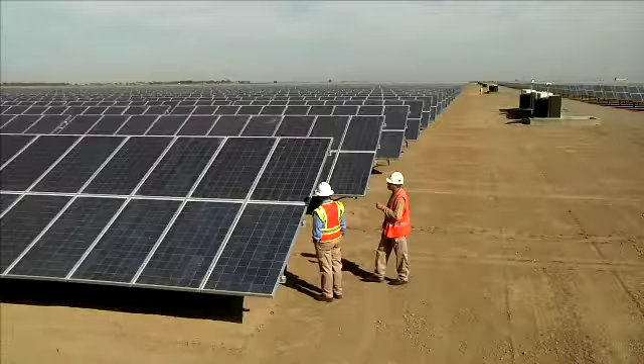On this edition of Our Green World, a company that specializes in storing renewable energy to help create the smart grid of the future.

Researchers show us the chemistry that makes our green living possible.

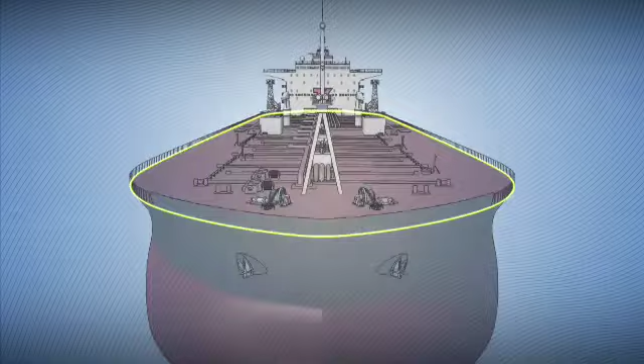But first, we take you to Vancouver, Canada, where the shipping industry has introduced a new design for the most energy-efficient ship on the seas.

Ocean shipping is the lifeblood of our global economy, but with the greening of the industry, future shipping is likely to be dramatically different than what it is today, especially for the next generation of tankers. Shipping overall is just such a huge industry, with 50,000 ships and 1 million seafarers transporting 90% of the world's goods. It's a big global industry.

And while it's one of the most efficient from a carbon emissions standpoint relative to other transportation methods such as rail, truck, or air, as an industry we want to constantly evolve and have a smaller carbon footprint.

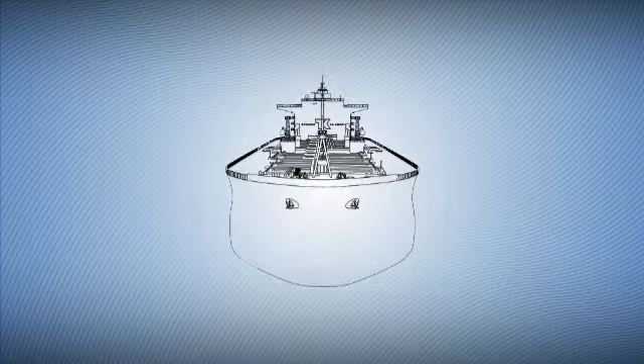New environmental legislation is underway, and shipping prices continue to rise. Since 1999, fuel prices have risen by over 500% and are now the greatest cost a vessel will incur over its lifetime. This means innovation in shipping is crucial for the future.

Fuel costs are every ship owner's number one cost. For example, if we were to order a new ship for $50 million, we would spend $250 million or more in fuel over its lifetime. So it makes economic sense as well as environmental sense to try to save fuel.

In the last decade, for sure, we've seen much more focus on the environment, and I think we've also seen the rising cost of fuel. And if you put those two together, and you take into account that we haven't seen any innovation, then it seemed like the perfect time to really start thinking about how you could do things differently.

As a world leader in shipping design, Teekay Corporation has taken upcoming emissions legislation and high fuel costs not only as a challenge, but as an opportunity to build the most energy-efficient ship possible, the One Spirit, an eco-design that reduces fuel consumption by 30%.

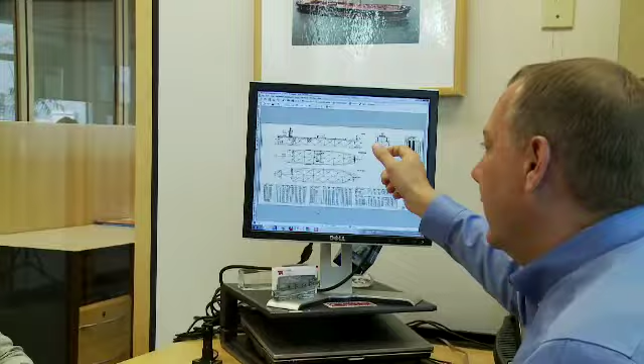While other shipping companies have developed eco-vessels by tweaking the design or doing simple add-ons like paint, Teekay took a far different approach by starting over and going right back to the drawing board on vessel fundamentals, here at its Innovation, Technology and Projects Unit in Vancouver.

So it made sense to go back and look at vessel design and alter the vessel design so that we were able to minimize the total life cost of the ship. So that's exactly what the team did.

Back in 2006, the project started off, and I think it showed great foresight by the project team, because they were able to look ahead and say, well, we don't believe fuel price is going to come down. If anything, fuel price is going to increase. So it makes sense to start to look at this project now.

And for a vessel design, it makes sense to go right back to where the rubber hits the road, so to speak. So we went back and we looked at the hull form, because that's where the ship interacts with the water first, is the shape of the hull. So if we were able to optimize the shape of the hull, then it gives us a very, very good platform to start to look at other innovations and other ways to reduce the fuel cost associated with the ship.

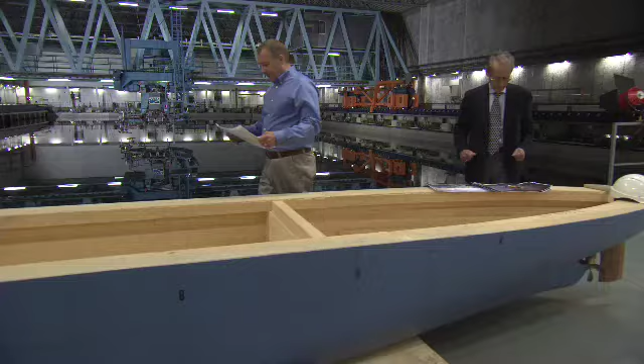Teekay then partnered with a world-renowned team of technical experts to create the tanker's ultimate design, undergoing rigorous tests at its testing facility here at Chalmers University in Gothenburg, Sweden.

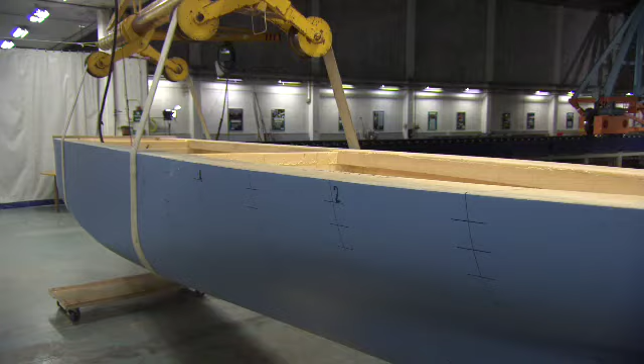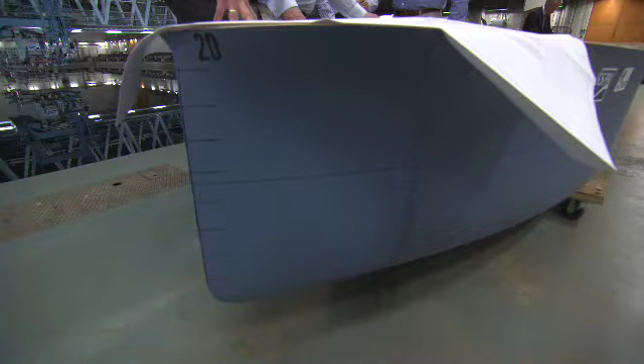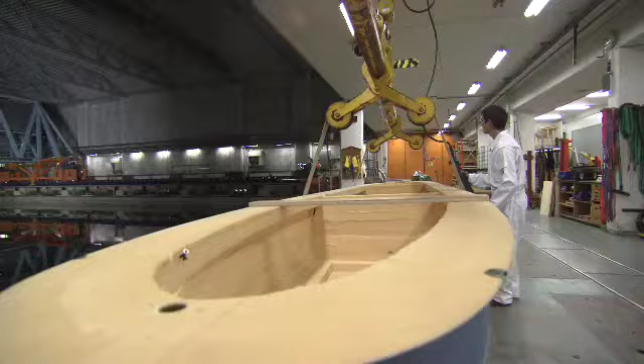But there are facilities such as this one behind us, where it allows you to build a scale model, put it in and start to see how it's reacting, and see if you're getting the savings that the computer indicated you were going to get. And that's what we're doing here today.

Well, because you have a facility here that allows you to simulate the exact same conditions, whether that be a hurricane or calm conditions, that you're likely to experience at sea. The end result is a tanker for the future called One Spirit.

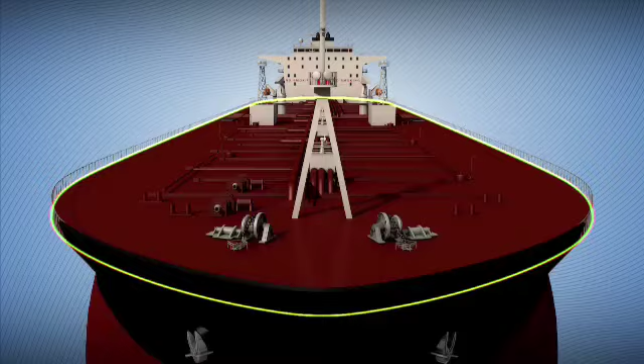Which focuses on 3 key design innovations, starting with the all-important hull of the ship, for which the team ran over 40,000 simulations to find the optimal design that reduces resistance for a given cargo capacity.

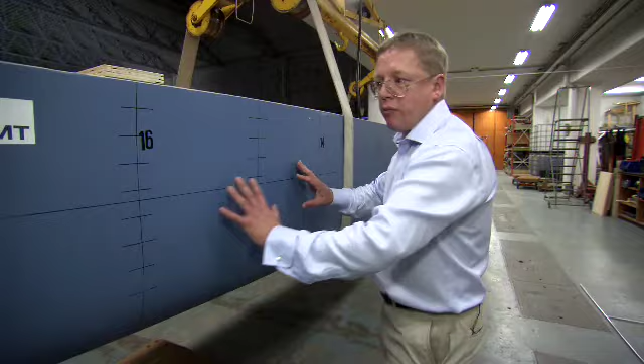On a conventional tanker, this portion is actually quite full, and the wave that comes round can dip down quite a lot, followed by a breaking wave. What we've done is made this portion much more gentle, so the wave coming around the corner manages to come back up without breaking. That contributes some 2 to 3% of the savings.

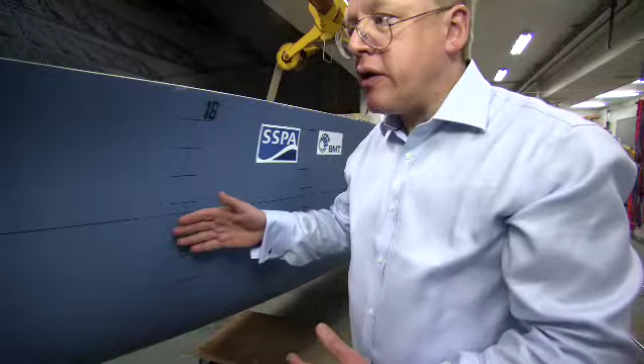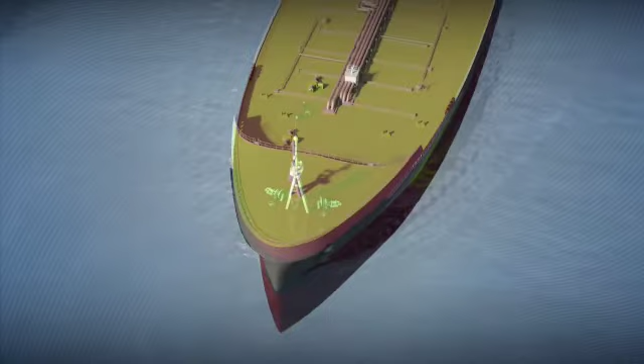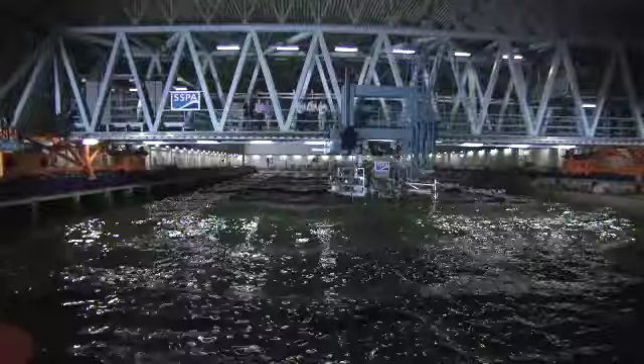By narrowing the beam of the ship and streamlining the bow and stern, the design team created a sleek new form that by itself resulted in over 10% fuel savings, while maintaining the cargo volume of the ship by increasing the hull's length and depth.

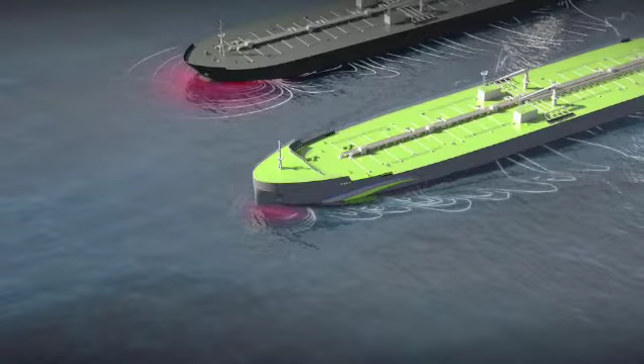The key thing about cargo carriage is it all comes down to $1 per ton or $1 per barrel freight cost. The quickest and single driver we can put in to reduce the $1 per barrel freight cost is to reduce the cost of the bunkers. The fact that this ship is more environmentally efficient, significantly more environmentally efficient, burns less fuel, has a direct impact on the landed cost of the cargo.

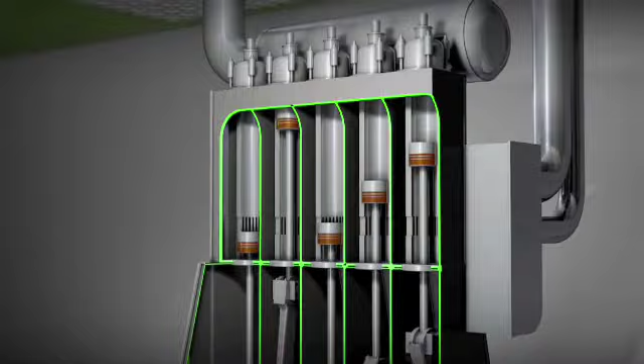The second innovation was adding a larger, more powerful G-type engine to the tanker, with increased capacity to slow the combustion process in order to recover more energy from fuel. So what we're willing to do is pay more money for a bigger engine, but that allows us to derate the engine, minimizing the fuel consumption.

The energy savings associated with this are sufficient to power 2,000 homes or to power 700 cars every day on the road. And if you expand that up into a fleet the size of Teekay, it's the equivalent of 42,000 cars being taken off the road every day.

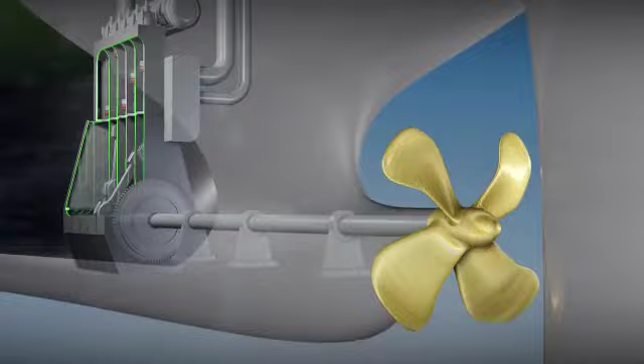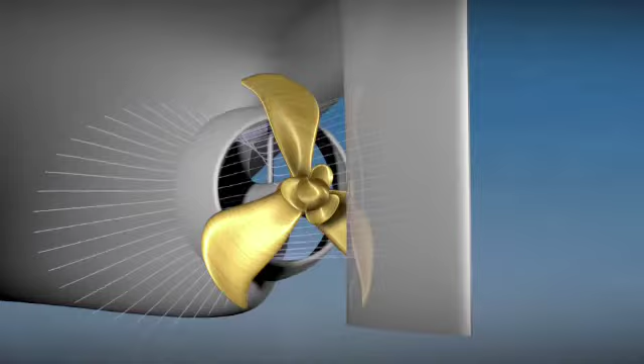The bigger engine and slower shaft speed resulted in a third important innovation: being able to increase the diameter of the propeller and reduce the number of blades from 4 to 3, to more efficiently move more water with each rotation. The basic thing we wanted to do was to have as large a propeller as possible, because by the simple laws of physics, the larger the propeller, the more effective the propulsion.

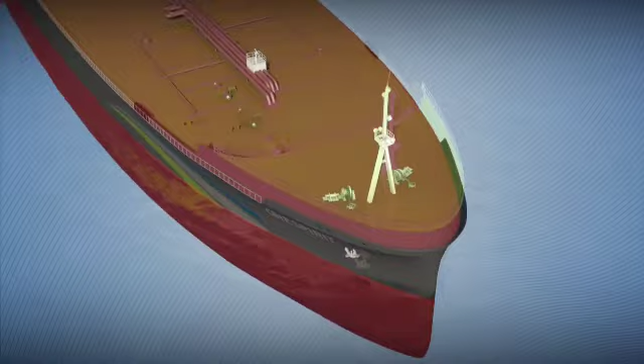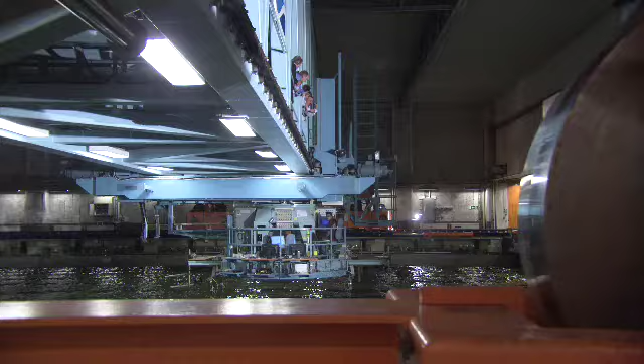So altogether, we have these 3 factors: the improved hull resistance, the improved propeller efficiency, and the improved engine efficiency, that have fitted together into what I would call a fantastically positive design spiral. This team and these 3 design advancements have all come together to create One Spirit, Teekay's newest green tanker, and the most efficient vessel in the shipping industry, with over 30% fuel savings.

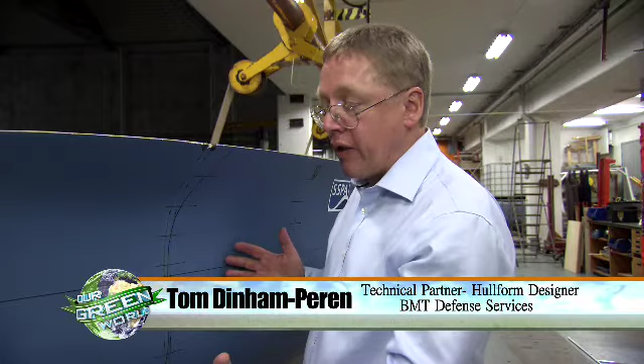This project is a hydrodynamicist's dream, to be approached to do a blank sheet paper design study, and we've come up with what we feel is a world-beating solution. Shipping is already the most efficient form of transportation out there, and what this ship does is improve on that — another 30% saving over what is already the most efficient form of transport in existence.

That's important to One Spirit customers like Teekay Tankers, with its fleet of vessels that transport crude oil around the world. Our goal is to provide energy to the world by being a leading provider in marine transportation. This ship that can save 30% in fuel will benefit our customers, our shareholders, and the environment. And so it makes just good business sense.

One Spirit may be the only green vessel of its kind, but it represents the next generation of tankers. Next, renewable energy may be the future for powering our green world, but X-Treme Power relies on being able to store it.

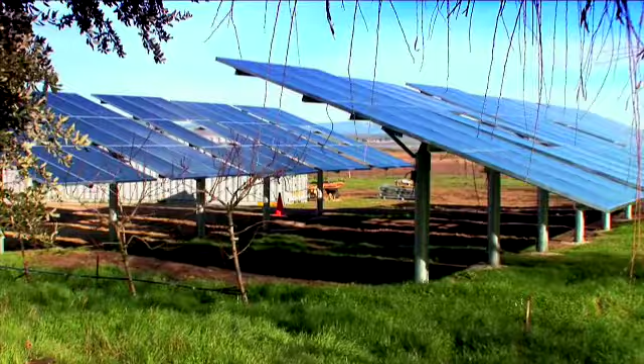Renewable resources like wind and solar may be the symbols of green energy today, but harnessing and storing that energy is the key to powering our green world, and ultimately creating the smart grid of the future. Storing wind or solar-generated power is very important because both of those resources are intermittent. The sun shines through a few hours of the day, and the wind blows intermittently, sometimes not at all. So the use of electricity requires a reliable source of electricity or power.

The combination of having wind and solar generation allows you to have a clean, relatively inexpensive source of electricity. In combination with energy storage, it allows you to provide reliability, so the electricity is there whether the wind's blowing or the sun is shining. The future of powering our cities and businesses resides in the ability to provide large-scale energy storage and power management.

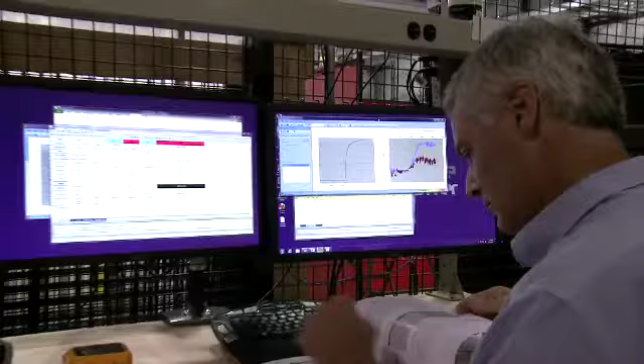It means extreme power, which is the very name of the industry leader in the energy storage market. Here at its headquarters in Austin, Texas, and its Kyle Operations Center, the business of designing and integrating power management for communities and providing solutions for massive energy storage is the round-the-clock mission of Xtreme Power's team of engineers and technicians.

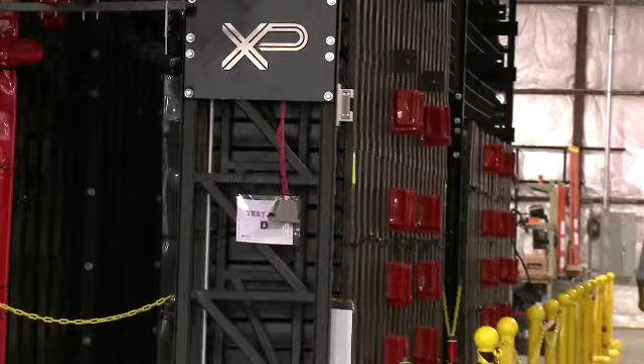What sets apart Xtreme Power is our ability to take software and engineering integration skills to use multiple energy storage chemistries, combine them with power electronics to provide grid-scale, multi-megawatt capabilities to store electricity and deliver it on demand, real time to the grid.

The power capability of this DC block is pretty incredible. I mean, really we're limited by the size of our front-end converter. But a general setup like this would be enough to power 500 homes.

Since its beginning in 2004, Xtreme Power has been installing power onto the grid across multiple projects around the country, including their pilot project in the Hawaiian Islands that supported the energy output of a 30-megawatt wind farm.

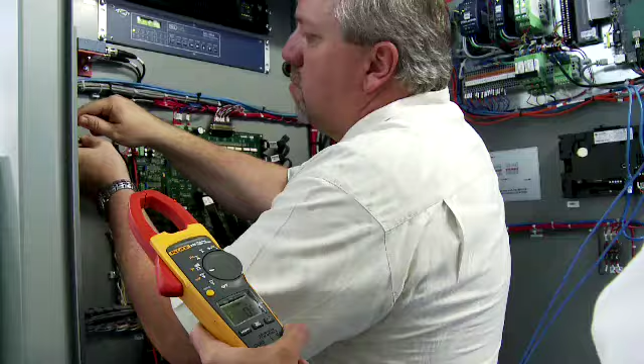The use of wind and solar in Hawaii allows them to use a renewable, clean source of energy, but it's intermittent. What we do is store electricity from either wind or solar-generated sites so that we can smooth and firm, meaning provide electricity when it's needed, whether the sun's shining or whether the wind's blowing.

For remote islands, being that their grids are unstable, having an energy storage system that Xtreme Power supplies is pretty important because it gives them a very stable power source.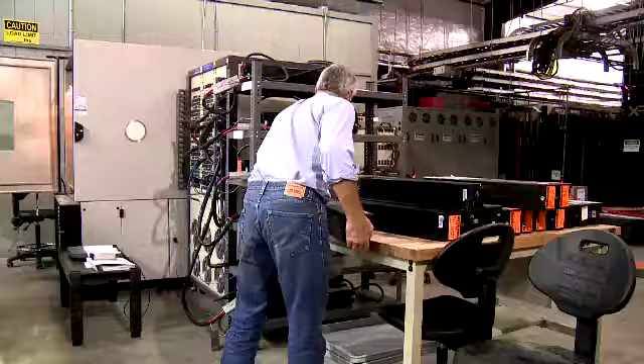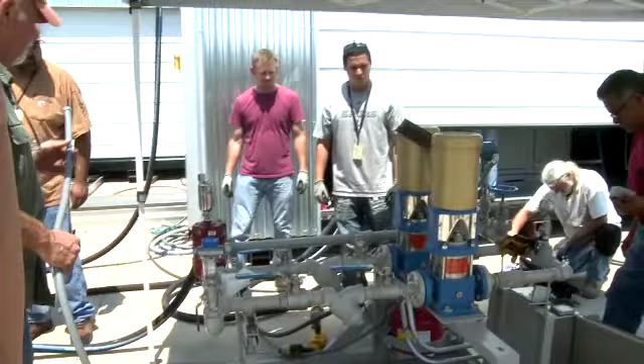X-Treme Power's unique energy storage system, known as the Dynamic Power Resource, has now spread across a dozen more projects, enabling clean energy resources to deliver more power onto the grid reliably and efficiently. It's through X-Treme Power's complete integration and system controls expertise that each project is able to overcome grid challenges, whether they're on remote islands or in congested load centers of a city.

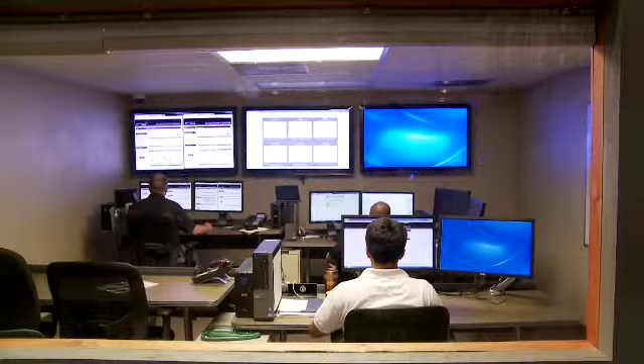Here at its Operations Center in Kyle, Texas, all of X-Treme Power's field installations are under microsecond control and analyzed around the clock. The Operations Control Center here is very critical. A lot of the applications that we're going into are dealing with utilities, the power grid, which as we know has a very high level of reliability required.

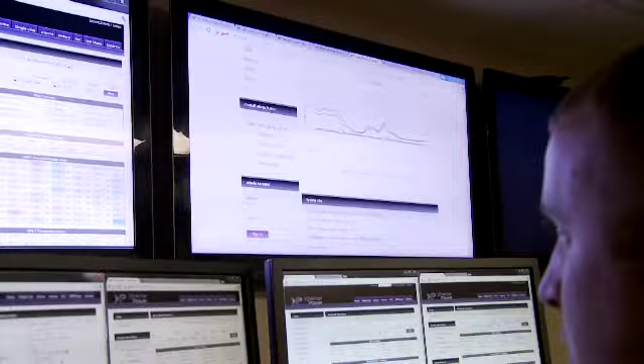So we're able to offer that sort of utility grade reliability that's expected, not only through proper design of our systems, but having a 24/7 monitoring center here that can respond very, very quickly to any sort of anomalies or any sort of event that we see anywhere at one of our sites.

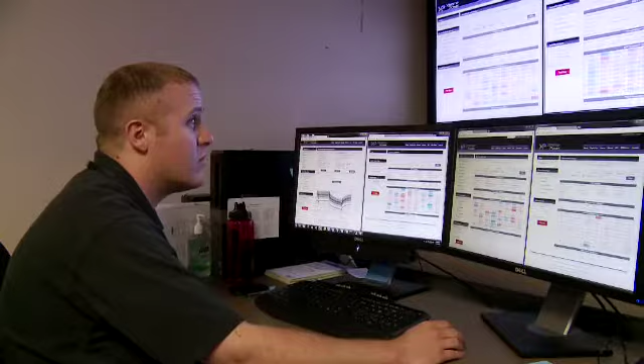This is also where any grid challenge or problem can be simulated in software, so it can be tested with actual hardware before ever going to the field.

Most of our sites have demands for very high levels of reliability, utility grade sort of assets we're providing. So we're able to provide this level of reliability that's expected by having this room constantly manned, and we're constantly watching our sites for any sort of events or disturbances that may occur.

Energy storage has the potential to become a $125 billion market on a global basis, and X-Treme Power hopes to become the backbone of the 21st century grid.

X-Treme Power wants to provide clean energy on demand anywhere in the world. We have projects on the drawing board now for China, Japan, Korea, Thailand, Malaysia.

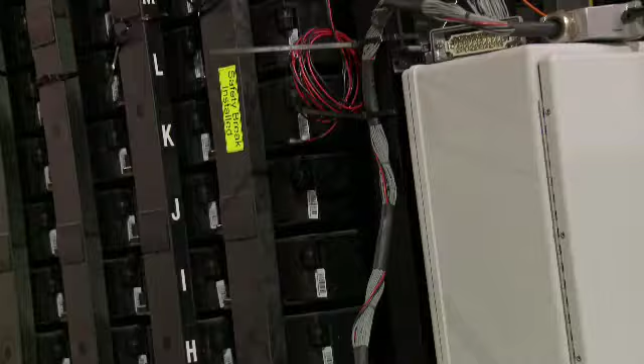So wherever you see the sun shine and the wind blow, or you need grid support, these are areas where X-Treme Power's dynamic power resource can give you this real-time control to provide a reliable source of electricity from renewable generation sites that are powered by wind and solar.

Storing clean, renewable energy will be the future for powering our green world, thanks to the innovative technology of X-Treme Power.

Next up, from wind turbines to laundry detergent, it's high-performance chemistry that is truly powering our green world.

Ultimately, it's the energy of the sun that produces our renewable resources to power our green economy. But today, man's innovation is aimed at sustainability in using these resources in all facets of our lives.

This is especially true at Huntsman, one of the world's largest chemical companies, which has been building a sustainable future through chemical research for more than 40 years. Producing over 33 billion pounds of products for a multitude of global businesses, Huntsman has a clear vision of its journey ahead to enrich lives through innovation.

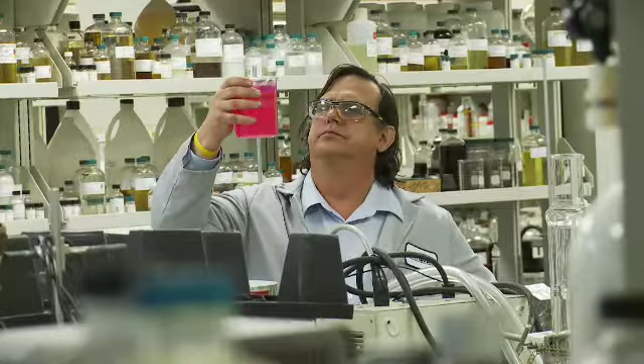It's extremely exciting. I mean, if you take just a look at all the different projects that we have in development that are either related to sustainability or to green chemistry.

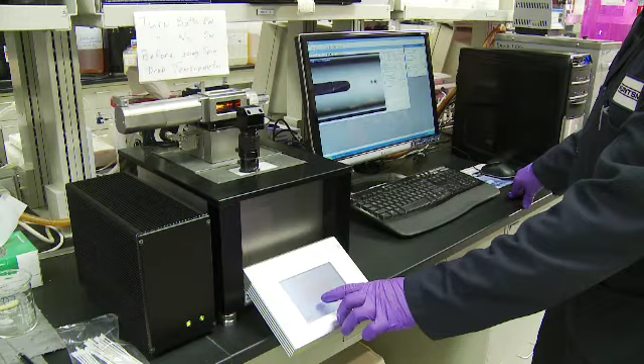Well, we see a better world being created by our innovations, which help to protect the environment. We allocate over $150 million annually and dedicate over 1,000 scientists and engineers at R&D facilities around the world to drive innovation. Huntsman's Performance Products division is working hard to help create a green economy.

One of the keys to a green economy is the ability to manage the life cycle of CO2, since it's a product of energy usage and a source of carbon for renewable resources. Here at the Huntsman Advanced Technologies Center in Houston, Texas, scientists are looking for methods to capture and store carbon for use in other applications to power our green economy.

To capture carbon dioxide, you take flue gas, the exhaust stream coming off a power plant, and a chemical that we manufacture. You put them in contact with each other and it absorbs the CO2. Then you pass it to another piece of equipment where you heat it and it releases the CO2. Now you have a pure CO2 stream that you can capture and compress.

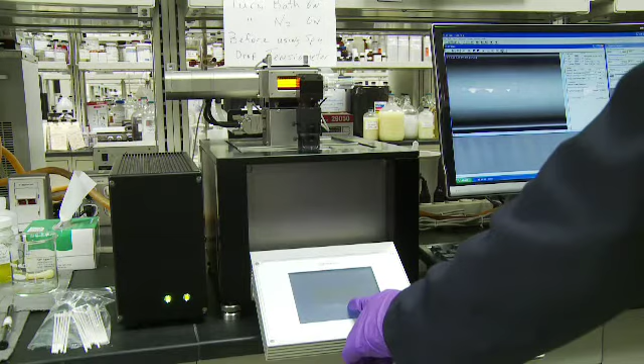Once it's compressed, you can use it as feedstock for another chemical, or you can inject it underground and do something like enhanced oil recovery. Or you could simply store it in a deep geologic formation.

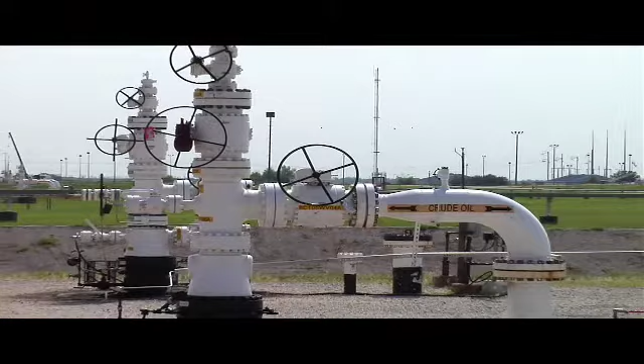When CO2 is used for enhanced oil recovery, it's estimated that it can help recover up to one-third more of the oil in the ground. In a typical oil reservoir, less than one-third of the original oil in place is recovered. But producers have discovered that pumping high-pressure CO2 into the well will thin the oil so that it can more easily flow to the producing wells.

We actually add surfactants to the carbon dioxide that is injected into an oil well. That surfactant foams, and it helps produce a sweeping effect on the oil, allowing more oil to be recovered out of an existing oil reservoir.

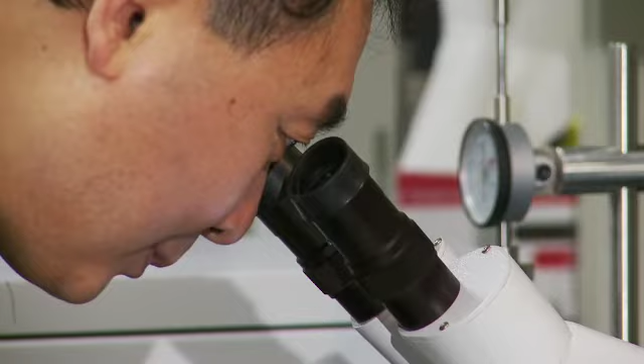Through its research, Huntsman has also developed a family of molecules called cyclic carbonates that are made from CO2. In addition to their sustainability impact of sequestering CO2, these molecules are also essential components in lithium-ion batteries, which are key enabling solutions to our energy needs, both in transportation and renewable energy.

If you break open one of these lithium-ion batteries and take a look at it, it's really chemistry that makes these things work. Part of the chemistry critical for the proper operation of a battery is getting the lithium to migrate from one electrode to the other. That's done with an electrolyte solvent system, of which we supply a critical component that enables the lithium to migrate back and forth across the battery.

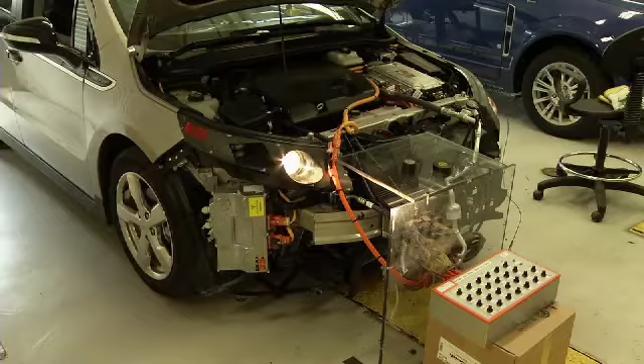Lithium-ion batteries also provide a safe and efficient means of storing renewable energy, so this renewable source can be captured, stored, and supplied to the grid whenever it's needed.

The Green Energy blog has written that advanced, economical energy storage is the most disruptive thing to hit the grid in the last 100 years. The US Department of Energy has written that advanced energy storage will have a $175 billion impact on the United States over the next 10 years.

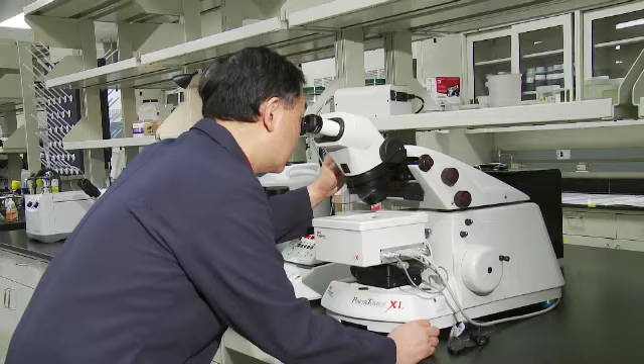Chemical research is also underway at Huntsman to help in the field of wind energy. Wind is a sustainable and clean source of energy that does not release emissions and does not require water for cooling. While the industry is working to develop larger wind turbines capable of producing more energy, Huntsman is working with blade manufacturers to develop new curatives to create longer, stronger wind blades.

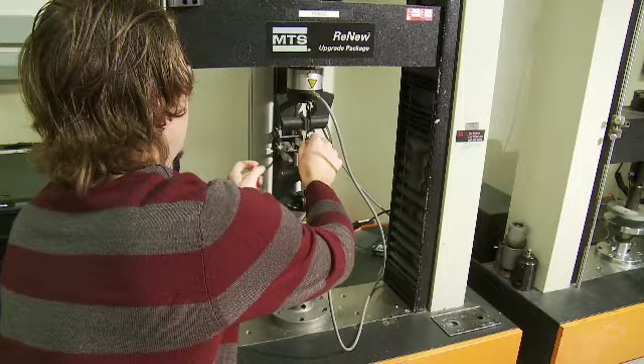The blades on a wind turbine are routinely manufactured by infusing glass fibers with a resin such as an epoxy. Here at Huntsman, we pioneered the development and production of the key materials that help epoxy resins cure and form a very light but also very strong structure. This technology has enabled blade producers to make ever larger, bigger, stronger blades to place on turbines, and it's also being used by the aerospace industry to make airplanes lighter.

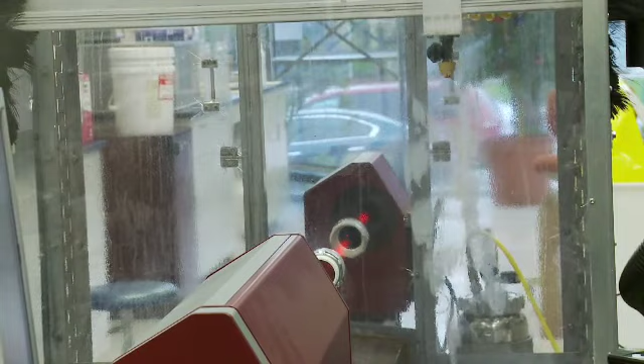Finally, as a global manufacturer of surfactants, Huntsman is producing molecules from renewable resources that increase the effectiveness of pesticides at the smallest possible doses for crop protection, enabling more efficient and sustainable farming, as well as using biomass to make green and sustainable products in the detergent and cleaning markets.

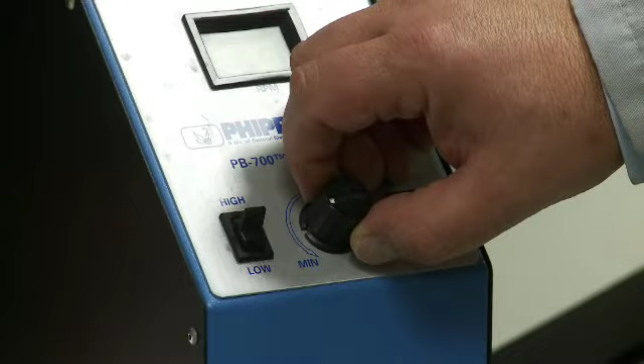You won't see a Huntsman brand laundry detergent on the market, but we make ingredients that go into virtually all of these products. People like me spend their whole life studying the behavior of the ingredients that go into these to get the best cleaning efficacy at the lowest price.

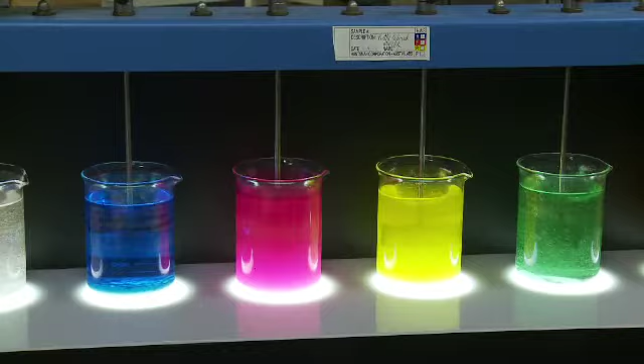I would say that the detergent industry is at the forefront of this green movement that's going on. It's a big initiative for Huntsman to look at renewable feedstocks that are locally grown and don't impact the food chain for human beings.

I would say that somebody would be hard-pressed to go through more than 30 minutes of their life and not have something that Huntsman has some direct or indirect impact. It's just very exciting to see us be able to develop these chemistries that contribute to the green economy, that contribute to sustainability, and it's just part of our vision as a company to build a better world.

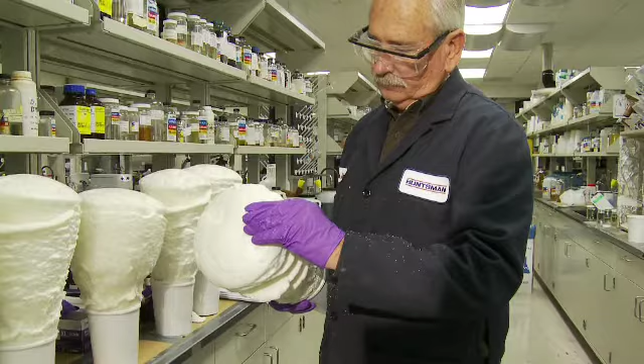It's impossible to know how much oil and gas exist or what will happen with climate change. However, by developing renewable products today, Huntsman is paving the way for a sustainable future. Finally, an American company that has made energy efficiency its number one priority, and it's softening the carbon footprint of manufacturing today.

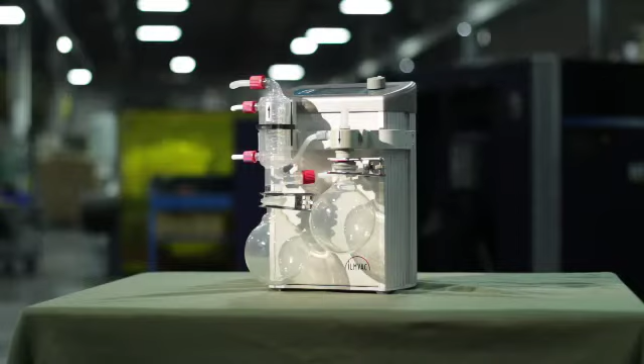Oil prices are heading up and up. We all know it when we fill our cars. But just think about all the other ways we use oil that isn't readily apparent. Gardner Denver is thinking about that a lot, and they also are thinking about ways to reduce the impact of machinery on the environment. The result of their innovation is a host of new products that are creating a lot of stir in the manufacturing industry.

You can't believe how many places air compressors are used. You don't see them all the time. Giant machines help improve our lives every day, from keeping our drinking water clean and safe to use in food factories and automobile plants. It might not look like anything too unique from the outset, but it is changing the way manufacturing plants are operated worldwide.

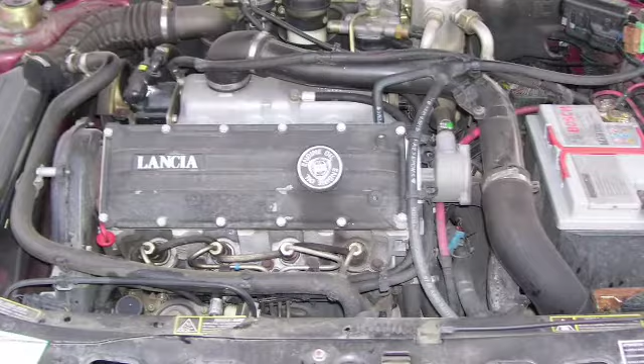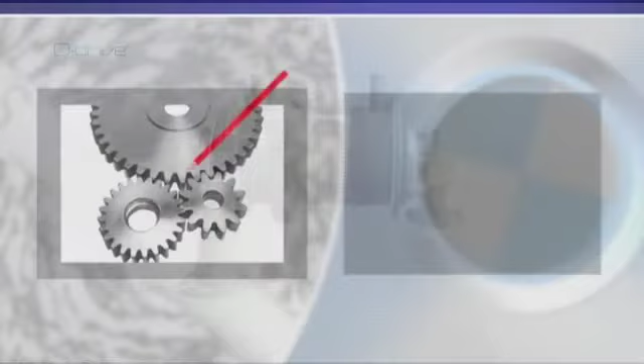First, picture a regular motor that has gears and traditional bearings that move together in order to generate power. To keep those parts moving easily, you need a supply of oil for lubrication. Production facilities might spend millions of dollars a year on oil, while at the same time polluting the environment. So imagine now what a gearless motor would do. No gears, no oil. Oil-free also means that the air is free of contaminants.

That, in essence, is the Quantima. The Quantima is an air compressor designed around a high-speed motor and active magnetic bearings. This design essentially eliminates the requirement or need for gearing, traditional bearings, so as a result there's no need for any oil in the package whatsoever. This is obviously a cost savings to the customer and is good for the environment.

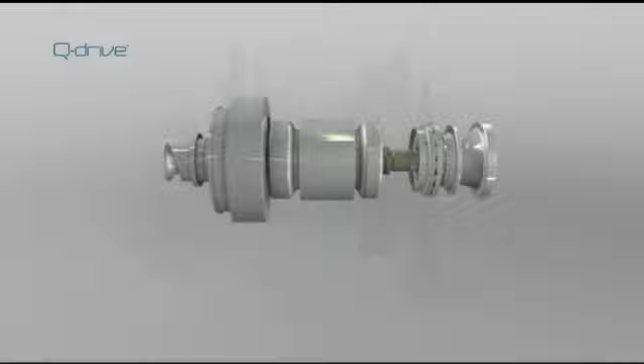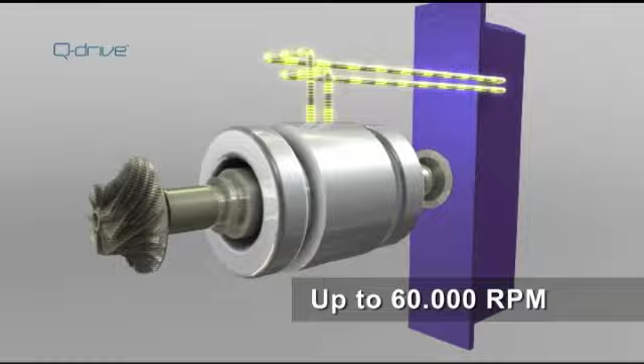The Quantima motor is made up of a single moving part and has no mechanical contact, so there is no wear and tear. The Quantima also automatically senses the compressed air needs of its location at any time and adjusts its output accordingly. To date, this two-stage centrifugal compressor offers the lowest possible energy use and associated carbon impact over the product life. In fact, customers are realizing energy savings of 25% and more.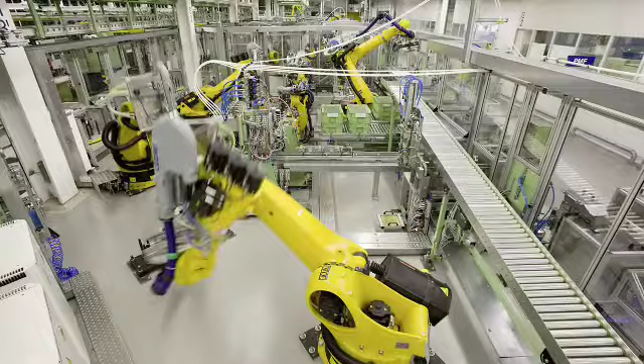One prominent place the Quantuma is used today is at the tallest fountain in the world, the magnificent Dubai Fountain. Four Quantuma units and several other CompAir compressors propel the water 50 stories into the air. And when Daimler-Benz installed the Quantuma in a plant, the energy savings were 5% higher than originally forecast. The Quantuma also is used to help manufacture the prestigious Jaguar brand automobile.

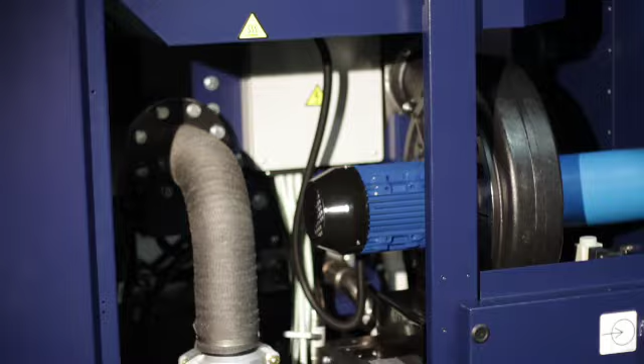We have many customers that count on us to help them reduce their carbon footprint, increase efficiency, and improve their energy savings. Since 80% or more of the total life cycle cost of operating an air compressor is energy, energy efficiency is our number one priority. The Quantuma is so innovative, it won the prestigious 2008 Winner of Product of the Year from Plant Engineering magazine.

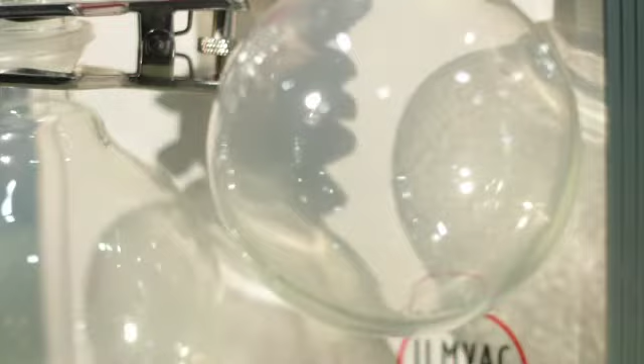But Gardner Denver isn't stopping there. Their division called Welch ILMVAC has created a new industrial vacuum that is all green. Its main use is for chemical researchers who need to remove solvents with as little heat as possible during the synthesizing of new molecules. This technology is called EcoFlex. It is the most sophisticated and environmentally friendly laboratory vacuum system on the market, developed to minimize the impact on the environment.

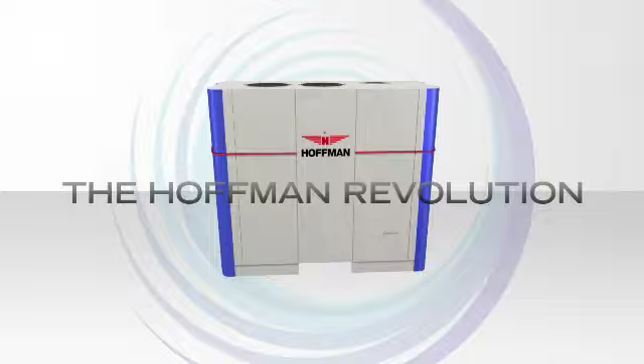You can't talk about green innovation in processing without saluting the Hoffman Revolution. This new line of high-speed centrifugal blowers was named Breakthrough Product of the Year for 2010 by Processing Magazine. The Hoffman Revolution is all-American designed and made, and it delivers a whopping 45% energy savings. The Revolution doesn't lose efficiency across changing demands like traditional blowers. Our performance curve actually moves with those changing demands and maintains the highest efficiency possible.

We're able to do this by combining advanced technologies such as a permanent magnet motor, which are among the highest efficient motors manufactured today. We complement that with a high-efficient speed controller, and we wrap that around an active magnetic smart bearing that actually communicates the precision of the speed at tens of thousands of RPMs, the actual location of the impeller and shaft relationship. We're all working together for a sustainable future.